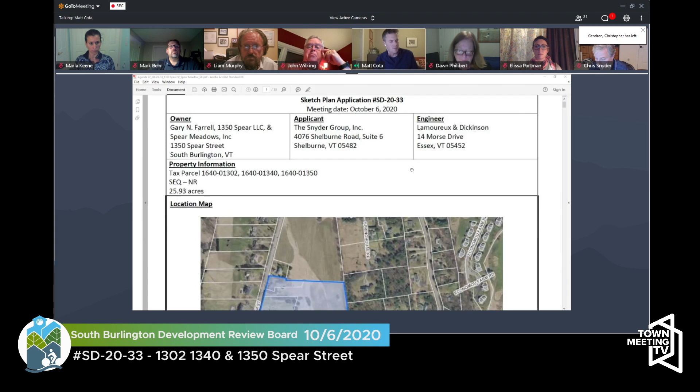So we move on to agenda item number 7, which is a sketch plan application, SD 2033, of the Snyder Group Incorporated, to amend a previously approved plan for a planned unit development on 25.93 acres consisting of 18 single-family dwellings, 10 two-family dwellings, 3 three-unit multifamily dwellings, and an existing single-family home. The amendment consists of changing the unit mix to 12 single-family dwellings, 13 two-family dwellings, and 3 three-unit multifamily dwellings, and an existing single-family home, removing connections to adjacent streets, and relocating the recreation path from off-street to on-street at 1302, 1340, and 1350 Spear Street.

Who is here for the applicant? This is Chris Snyder. Hey, Chris. Hi. Anyone with you, Matt? Yes, it's Don.

I would like to make a disclosure. So my understanding is that the law firm of Murphy, Sullivan and Kronk is representing some abutting neighbors. I'm not going to recuse myself, but I want to disclose that a partner in that firm, Liam Murphy, who I believe is on the call tonight, is a longtime good friend of mine, but I don't believe that poses any conflicts. Just wanted to get it on the table. I appreciate that, Dawn. Thank you very much.

Okay, Chris Snyder, is there anyone else with you? Or is it just you, Liam, tonight? Murphy is also going to be here. Liam, Murphy, okay, anyone else?

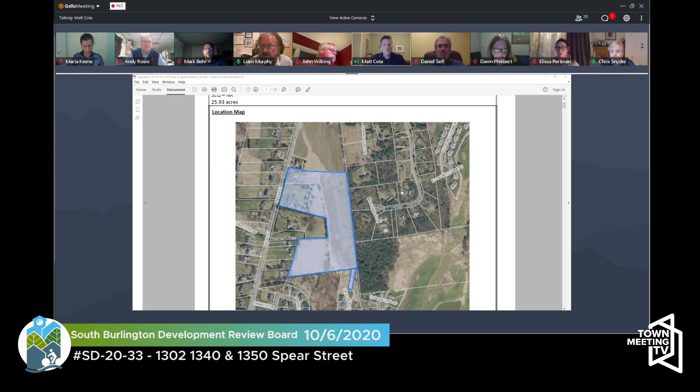This is a sketch plan. What is a sketch plan? A sketch plan is a high-level review and discussion by the Development Review Board where an applicant receives feedback from the board on major elements of a project before it is fully designed. During this meeting, the board may provide oral guidance to the applicant, which does not constitute the board's determination that the application meets the purposes of the land development regulations. These comments made during a sketch plan are to help guide the applicant to a later application that meets the requirements of South Burlington's land development regulations and contributes to the goals of the comprehensive plan.

A sketch plan is not a formal hearing. It does not result in a binding decision. There is no vote and there is no swearing in of the applicant. The board may choose to continue the meeting at a later date if there are questions that remain to be examined. The future date will be announced prior to concluding the item for the evening, and upon conclusion of the sketch plan meeting, the applicant who wishes to move forward with their next project will have to submit a complete application. The next level of review includes additional public notices and a formal public hearing.

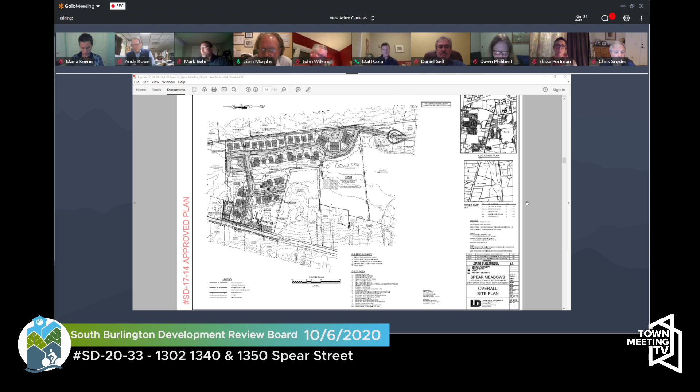Go ahead, Liam. Nope. Liam, can't hear you. We can't hear you. Liam, are you on mute? He's not on mute. Now he's on mute. He's going in and out of mute. But he's off mute now, but I can't hear him. So I'm going to send Liam a message on how to call in.

Just a second. Chris, while Marla does that, which do you think would be the better plan to show while Liam has this overview?

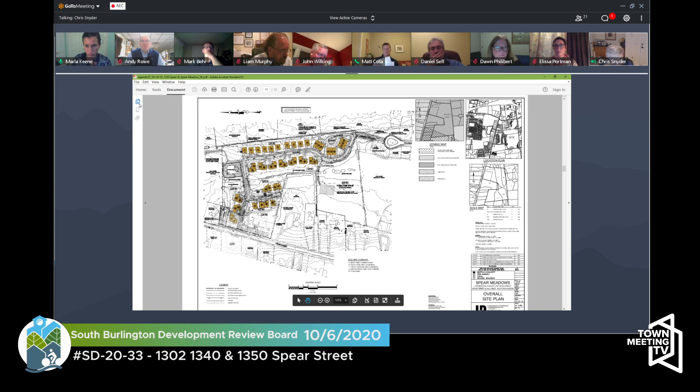I think you're on mute now. I think we could walk through the staff notes. There are 6 items that were presented. The first was the segment of Vale Drive north of Elm Street is proposed to being deleted. So that is the first item on the staff notes. And I'm just going to use the staff notes as a guide.

Hold on. So I just, you can't, know what to show on the screen while this discussion was going on. So just hold on a second.

You're good, right there. So that is a request being made on this application.

The next item is the southernmost segment of Vale Drive is proposed to be restricted to emergency vehicles only. That would be a narrow street that would allow for emergency vehicles through, but not traffic.

The third item: 2 single-family homes are proposed to be relocated from the northeast corner of the property to the west side of Vale Drive. What that does is eliminate 2 single-family homes and adds them, creating 2 duplexes on the west side of Vale Drive.

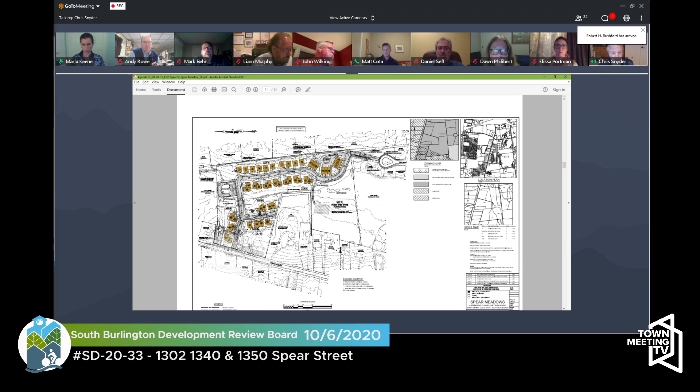The fourth item is the shared use path. Is it possible to see the map so we can see the streets and the houses? Sure, Delilah, is that possible? That just helps me visualize it while you're talking, if you want me to, Matt. Is that helpful? Yeah, that'd be great.

So we're talking about Vale Drive north of Elm Street proposed to be deleted. Can we just zero in on that? That's the description over north of Vale Drive. It would be if the red arrow goes north, or red dot.

There you go. It eliminates the connection to the Spear Street property to the north. There was a proposed road connection to the UVM property, and that would eliminate that road connection. So what you're looking at is what we're requesting for the modification. Okay, so that would be deleted.

Number 2, the southernmost segment of Vale Drive proposed to be restricted to emergency vehicles only. Can we put the red dot over the southernmost section where your proposed restriction would be in place? Who's operating? Marla, do you want to take the drawing tool? Who's the presenter, Delilah or Marla? Oh okay, there you go. So that connection to Vale Drive would be emergency access only, and not a road that goes through there. That's correct, that's number 2.

Number 3, 2 single-family homes are proposed to be relocated from the northeast corner of the property to the west side of Vale Drive. The homes on the west side of Vale Drive are proposed to be changed from a mix of single-family homes and duplexes to all duplexes. So are we increasing the number of units here? Where are these units? 2 single-family homes are proposed to be relocated from the northeast corner of the property to the west side. That's correct.

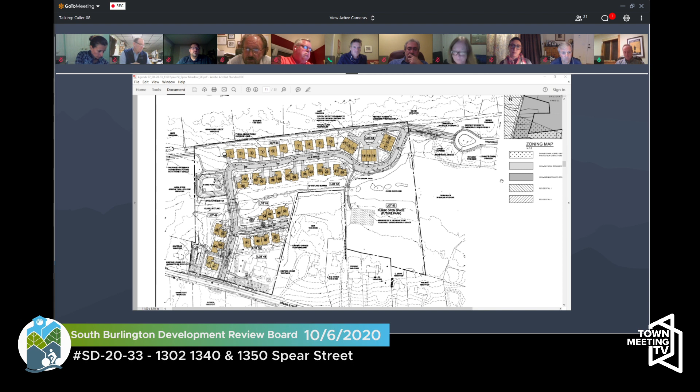To give some background: while the appeal on the permit from the city was resolved in the environmental court and in the Supreme Court, there was a separate appeal of the Act 250 permit by the neighboring properties, focusing on issues relating to preservation of prime agricultural soils, scenic and natural beauty and aesthetics, and traffic. Those are the three issues we're trying to resolve, and we've come to an agreement that we think will improve the project and make it better for everyone—what Chris has just outlined.

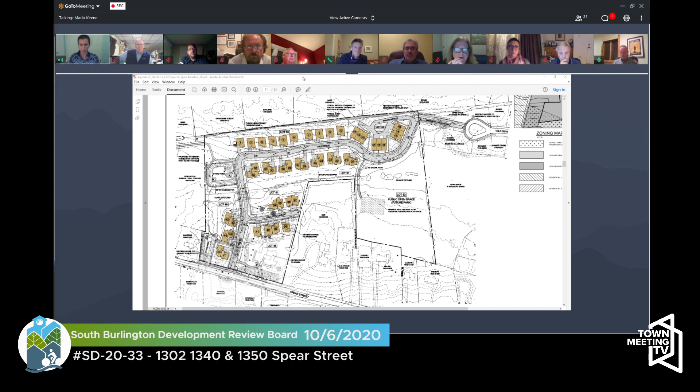But let me tell you the reasoning behind them so that you can understand. Marla, is it possible to put up the photographs that I shared with you, or can I share my screen? Delilah runs the projector—those are in supplemental if you're ready. Okay, let me just open that then. It should be the file called MSK public comment. All right, got it. And here it comes.

One of the primary concerns raised in Act 250 is that the land along Swift Street and east of Spear Street is owned by the University of Vermont and has been used for active agriculture for many years, continuing still today. One of our concerns about the plan as approved involves two issues, and we're proposing some changes to try to help preserve that active agriculture.

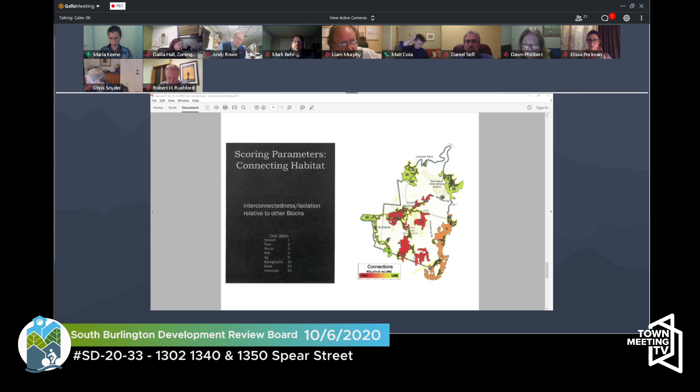You can see, I know this is small, but the area in the middle where it says Vermont National Country Club, number 8 is the area of woods just to the east of this property.

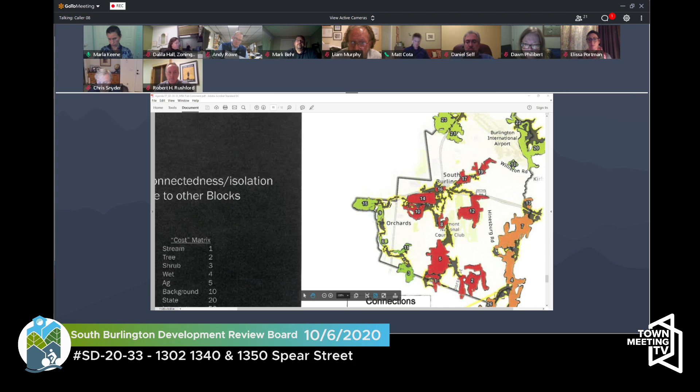If we go to the next one, you can see the connections here are in the darker areas. The takeaway from this habitat map is that unfortunately there are only a few blocks of habitat left in South Burlington, and what's really important to support that habitat are the connections between those habitats.

So one of the reasons to move this path away from the hedge line is to provide for that protection.

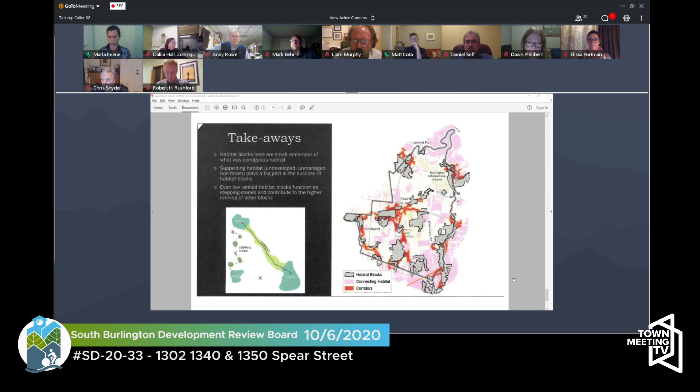Marla, could you go back up to the beginning, maybe to the third slide, which is a close-up of Pinnacle at Spear. Yes, this one.

One of the issues staff has raised is that if the path is moved in front of the homes, it will be in front of the driveways, and therefore there are some issues. However, the pathway already crosses in front of one of the people coming from this cross street.

Which street name I can no longer remember, Four Sisters Road maybe. If they're coming down either of the Pinnacle Drive streets, they're already on the sidewalk or on the street. To then say we're going to push this short area up against the woods instead of having it go in front of the houses, just the same way as the rest of the neighborhood, seems very short-sighted in light of this effort to protect the woodlands and the edge of that forest.

You can imagine now, it's obviously a vacant parcel of land, so there's not a lot of activity. But if you put the bike path there immediately against that hedge and woodland, I think it's going to have a very strong effect on that issue. That's why we think the path would be better moved, just in the same way it crosses at Pinnacle.

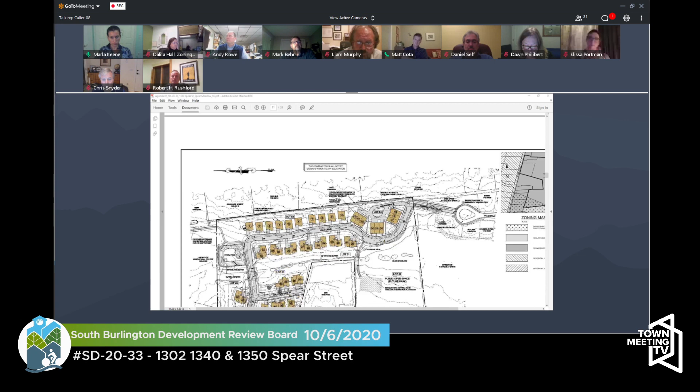We think that the change in the north connection is critical. There's really no reason to force that to be built today, it would really encourage UVM to develop their land.

And third, this connection from the south, we'd like to eliminate it and make it an emergency access to eliminate a cut through. And of course, as I've discussed, moving that path away from the hedge, we think is critical to protection of that wildlife area.

So those are the reasons behind the three changes that we have. One of the things that staff has brought up is that this plan has been approved and is final, but unlike many plans, this is not a Stowe Club Highlands matter, where we are trying to change a plan upon which there's already been reliance.

Nothing has been built at this point. So we think it's within the commission's authority to allow these three minor changes in order to help make this project a little better than what has been approved. Be glad to answer any questions.

Thank you, Liam. Are there any questions that the Development Review Board has for Liam or for Chris?

Matt, it's John. I have a really basic question. Understanding the rules we live by, the LDRs and the comprehensive plan, the city says these properties should interconnect or have the ability to interconnect. I think all of what you've said about interconnection goes directly against what the city plan is, and I don't see how you get around that.

Dalila, could you show the existing approved plan? It's the one previous to the colored CAD looking drawing in the packet. This one? Yep. So in this plan, you can see the approved layout. The roadway, I'm zooming in, it's a 26-foot wide road width, and obviously it's certainly not a straight shot.

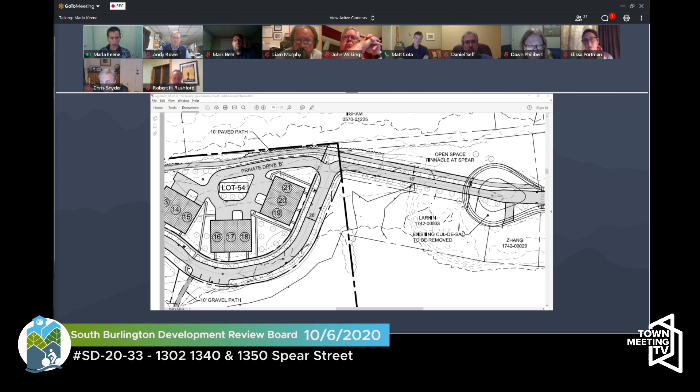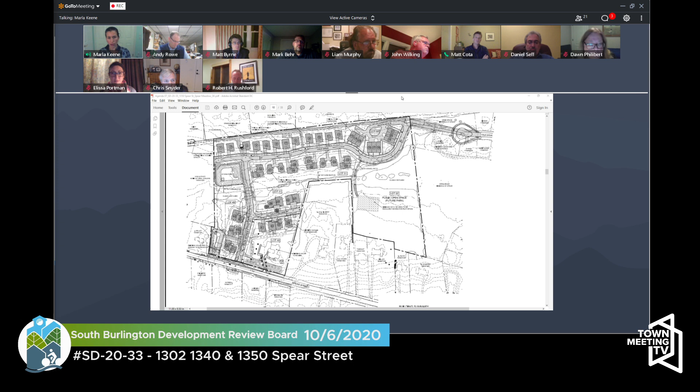The other thing I wanted to point out, and I don't know that we're necessarily too fixated on this, but since I have the floor for a second, the UVM parcel to the north, or to the left of the page, that Liam was referring to, that is SEQNR, which is the same zoning district as the subject properties. So that has the same development potential as the subject properties, and the city has not heard anything from UVM about their intention to sunset that development potential.

Thank you for that update, Marla. Yeah, the cut-through discussion, I recall it from 3-4 years ago when we had it, and it's an interesting, important discussion, especially for those like myself who live in neighborhoods and often think about that, and have kids and dogs and all that stuff. But the reality is, in my opinion, I think the LDRs are clear, and we're supposed to create connectivity, and that's not just walking and bikes, that's cars. And until those change, I don't see my decision changing from what it was in 2017.

Matt, oh, sorry. Food for thought. Go ahead, Mark. Oh, I was just going to say, you're right.

It is our directive to create interconnectivity, but that doesn't mean we want to create interconnectivity throughways designed to be cut-throughs. This is not designed to be a cut-through; it was purposely thought through, discussed, and designed to actively discourage it. If you're coming down Nowland Farm, you're not going to turn right onto Vale Drive or Four Sisters to get to the end of Vale Drive, onto an 18-foot road down from 26, turn left, bend around, go down, turn left, as opposed to a straight shot down Nowland Farm and then turn right onto Spear and continue heading north. This was designed just to connect the two neighborhoods, to create that neighborly interconnectivity, not to create a circulation traffic throughway.

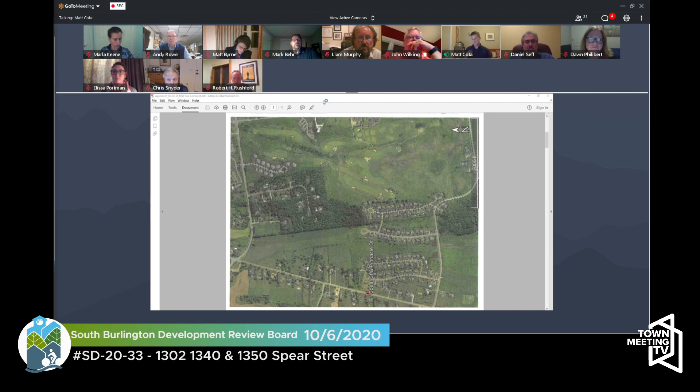Okay, so a couple things. One, I want to acknowledge receipt of a very well-written email that I believe is in the packet, that went to Paul Connor and myself, but anyone can read it, from Dr. Michael Scollins. Very good letter, very helpful, appreciate it.

I also have some comments in the chat box from Steve Woodward and some others which may or may not be meant for the public. So I will give anyone who wrote in the chat box, or anyone who would like to, an opportunity to speak about this sketch plan application, this permit amendment. If there's anyone who would like to speak on the record, please say your name and I'll give you an opportunity to speak for 3 minutes, or you're welcome to write in the chat box, and Delilah and Marla will record all the comments made there so we can have those in the record. But if you'd like to make a public comment using your phone or computer, just say your name.